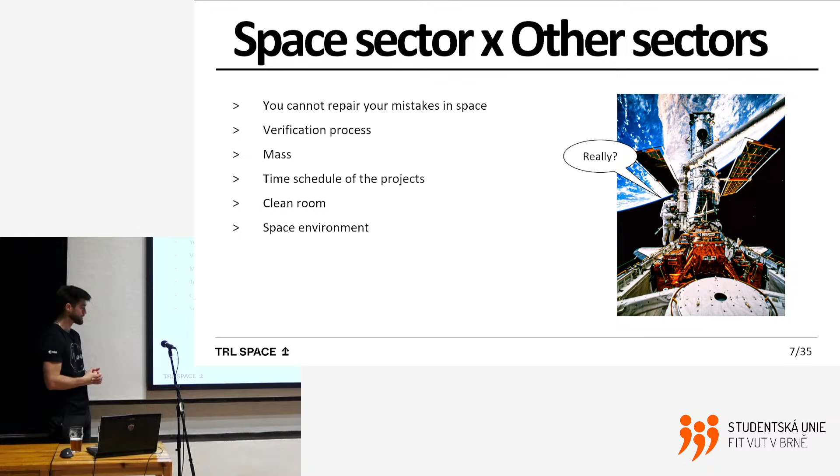And the other thing, when we spoke about environment — the space environment is also a little bit different than down here, because there is really low temperature and also high temperature. There is radiation, which is changing with the orbit, by the way, and there is also vacuum. So you need to be sure that your satellite can withstand all those things, and for some years, of course.

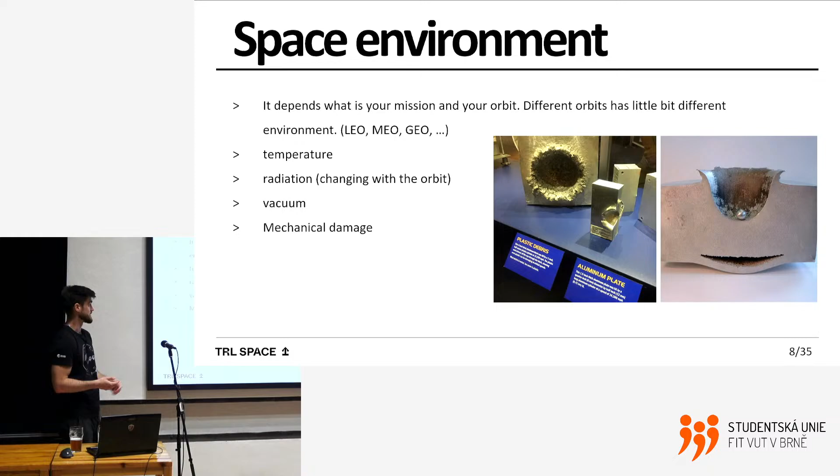So does anybody want to join this quiz? All right, so I owe you a beer—it was exactly it. So the damaged area is about 40 centimeters.

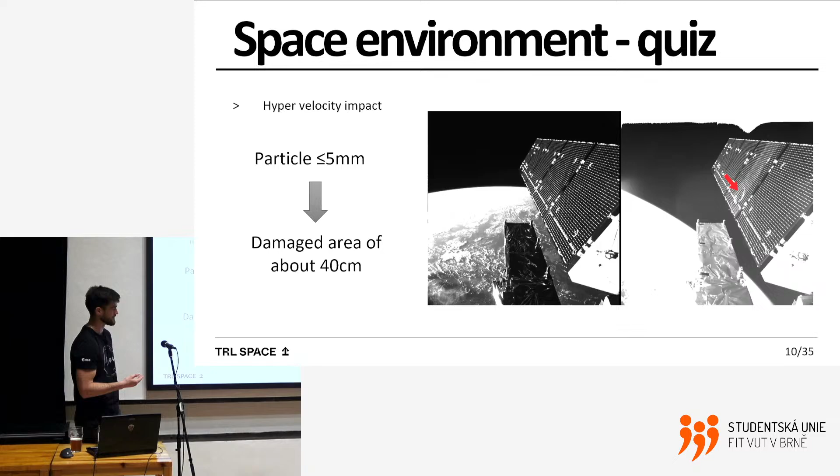So we know about the space environment, but we cannot forget about the ground environment, because we need to manufacture it there, test it there, and transport it there. When we talk about transport, you need to develop and design jigs for it. We call these GSEs, short for ground support equipment. And we do it by truck, plane, or ship.

So you transport the satellite to the launch pad and put it into the rocket. You launch it, and you can imagine there is a lot of vibration, acoustic noise, and static loads—all of which the satellite has to withstand. After you reach orbit, you need to separate the satellite from the rocket—that's another thing, mechanical shock. So it's really a nasty environment also.

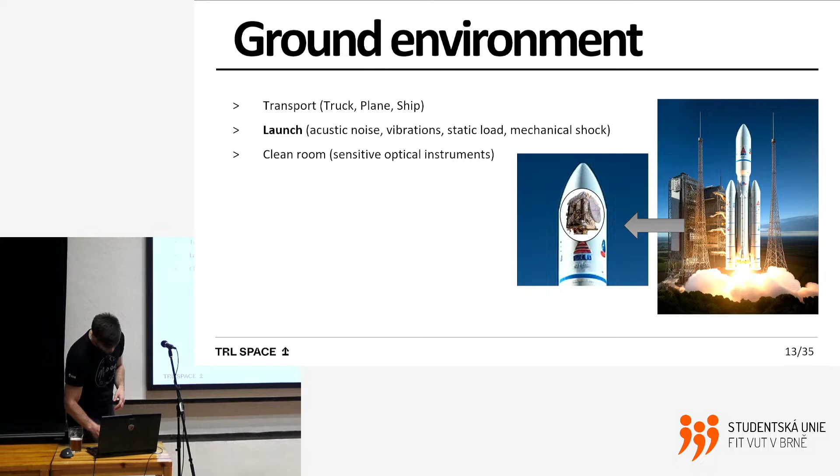And like I said before, you need to integrate, assemble, and test your device in a clean room. For those who don't know what a clean room is, you can imagine it as a surgery or operating room, because it's really similar—you have to wear gloves, wear some funny coats, and it's a really clean environment.

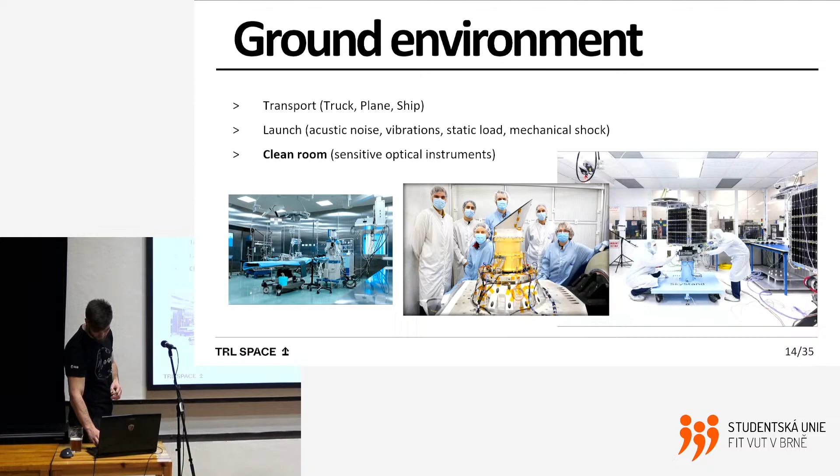So we move to something more important, and that's the structure types. Basically, when we develop the satellite, we have three options: beam or truss structure, structure from machined parts, and composite or sandwich panel structure.

I put those pictures just for better imagination—don't worry, you will see some satellites. Beam and truss structure: a beam or truss is an element or part which is really long and thin. When you put those parts together, you get a really nice structure which is lightweight and can withstand a lot of stresses and loads. You can see the example in normal life in a construction crane.

Then we have structure from machined parts, and machining is a technology process based on removing material—you have one block of aluminum, let's say, and you remove material into the desired shape. Then we have a composite or sandwich panel structure, and the best example is a door with filling.

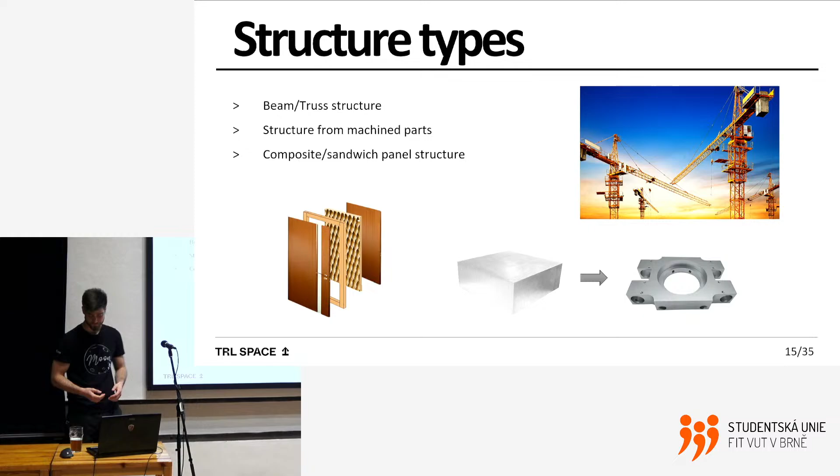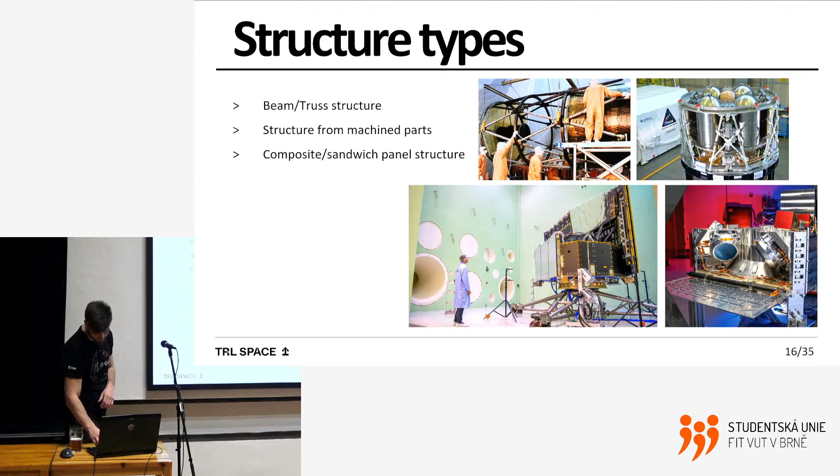So we know what the structure types are, and now I want to tell you some differences between small satellites and the big satellites, because there are some.

You can see on the left side there is a CubeSat, which is a standardized sized satellite, about this size. It's 34 centimeters high and weighs 12 kilograms. Just for your interest, this will be the look of our satellite.

And on the right side, there is some huge monster called PLATO, which is like 3.5 meters high and weighs 2.3 tons. You can already see some differences here.

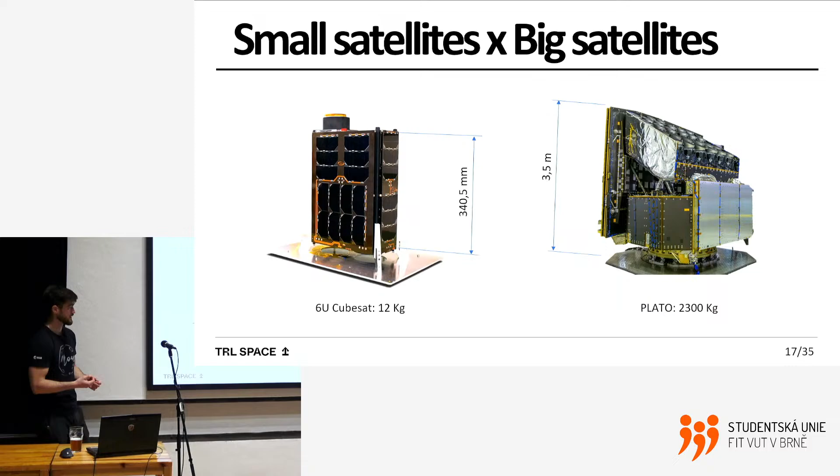But there is one big difference between the big and small satellites, and that's the logic behind the development and design. The bigger satellites are usually made with the logic that you have a payload, and you build a structure around the payload.

So you can see the James Webb Space Telescope. There are some scientific instruments and mirrors, and then there are subsystems which are placed underneath.

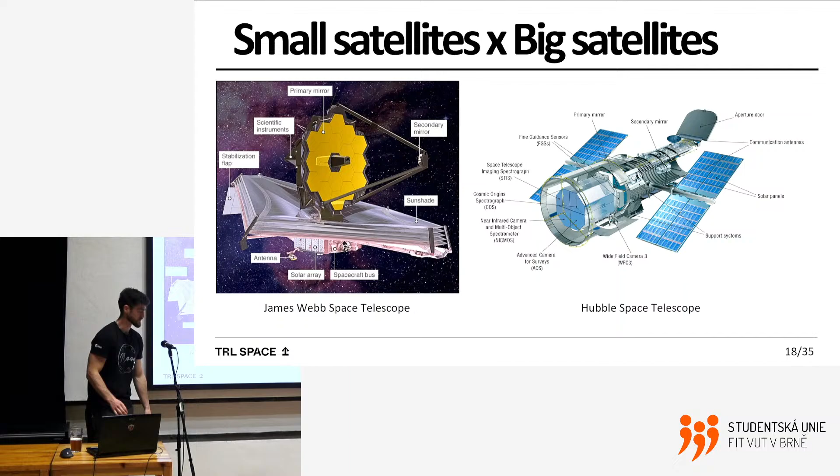Then we can see the Hubble Space Telescope. It's basically one big camera, and the subsystems are placed in the middle sector. If your eyes are good enough, you can see the node support system, and in this place almost every subsystem is placed.

So you can see also in those satellites that every big satellite looks a little bit different, right? And also one common thing for those satellites is that they are usually made from sandwich panel structure.

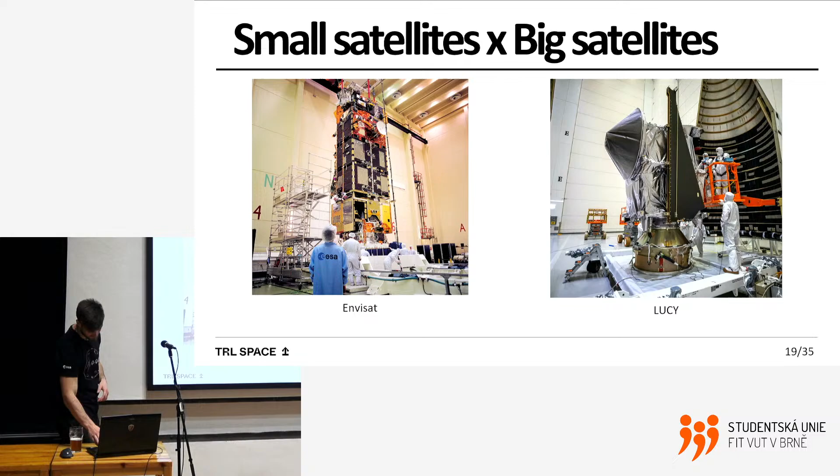On the other hand, the small satellites, as you can see, look pretty much the same. You can see the difference here. Those are CubeSats, which are, like I said, standardized sized satellites.

So the logic behind the small satellites is that you have some standardized structure, and you choose the structure due to your payload. So you have some camera, and you can see that, for example, this satellite is small for my camera, so I will choose, for example, the NAPA-2 structure, right? So this is, let's say, the difference.

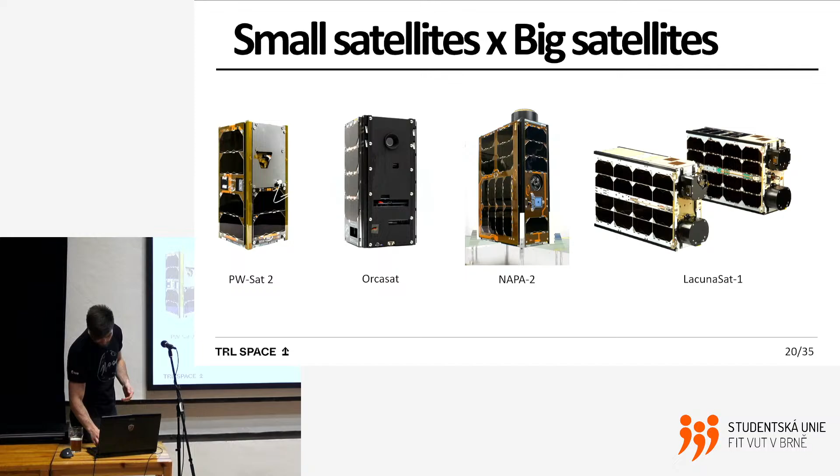And also you can see that in small satellites, they are usually made from machined parts, like you can see here. On the right picture, you can see an exploded view where the parts are machined, and then they just attach it together. That's it.

All right, so we can just move on. There is another, let's say, division of the structure types. We can divide it into the primary structure, secondary structure, and tertiary structure. One thing about the tertiary structure, it's not always the case that you have it. It's usual in the bigger satellites that you have some tertiary structure.

The definition of the primary structure is that it's the part of the structure that carries the main flight loads and defines the overall stiffness.

Then we have the secondary structure, which is structure attached to the primary structure with negligible participation in the main load transfer and overall stiffness. And then the tertiary structure, which has no participation in the main load transfer.

So in other words, when your tertiary structure fails, it basically means almost nothing, just a minor limitation. But on the other hand, when your secondary structure fails, it has some severe limitation for the mission, and you cannot do some tasks. And when your primary structure fails, it's just a game over, the mission is a failure.

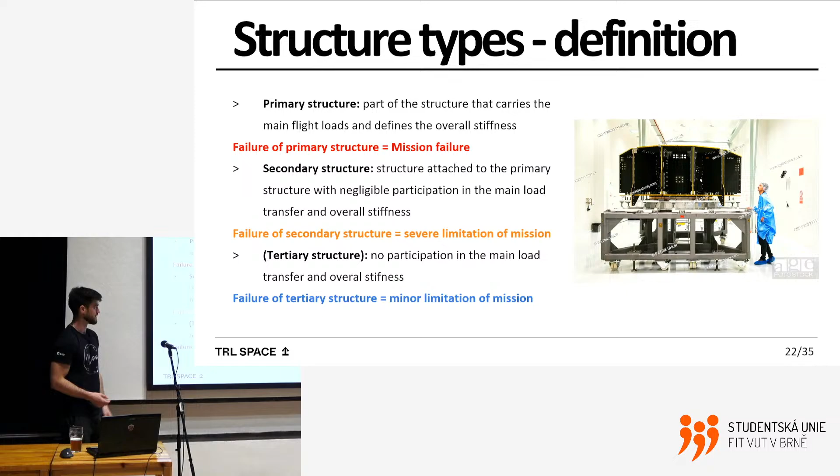There you can see some examples of the primary structure, secondary structure, and tertiary structure on those specific satellites. And when I was talking about the tertiary structure, they are shown as blue boxes, but it's, let's say, not the whole box.

It's just the case for the electronics here, because if the whole box fails, the mission is over also. But if there is just some scratch or damage of the case, it's all right. And then on the right side, you can see the primary and secondary structure on the CubeSat structure.

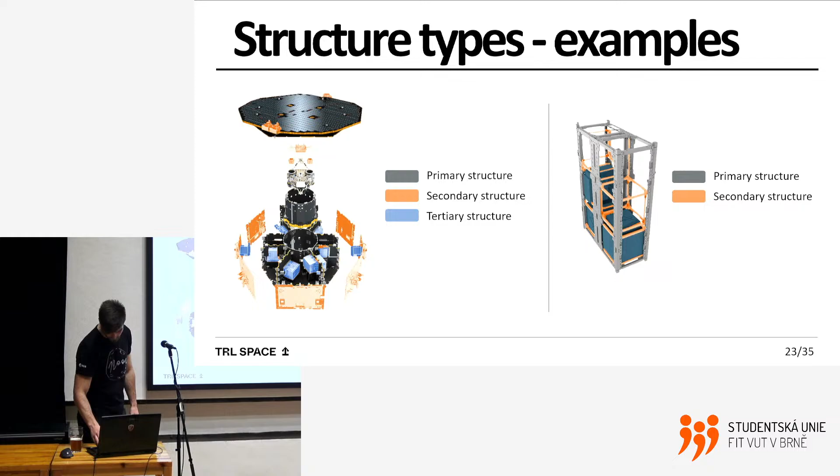So now when we know what the structure type is, we can move on to the materials. And if you remember the requirements put into the structure, mainly the strength, the stiffness, and most important the mass, it's logical that we have a really limited choice when it comes to the material. So we basically use aluminum alloys, stainless steel alloys, titanium alloys, composite materials, and sandwich panel, or sandwich materials.

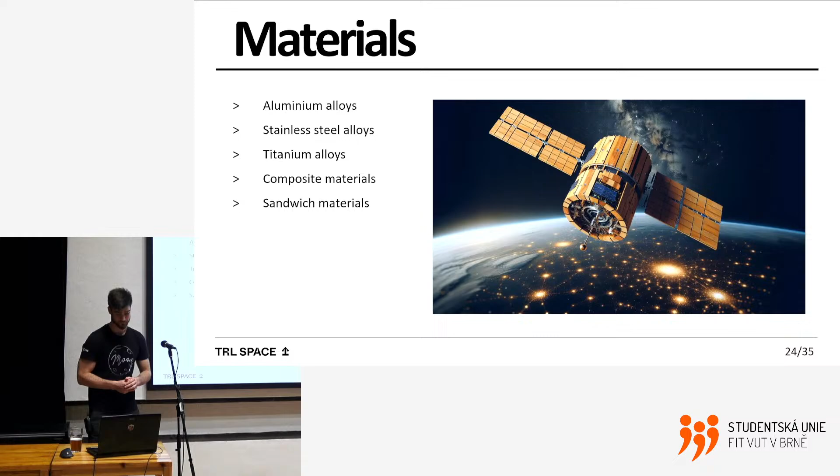The most widely used, I would say, are the aluminum alloys because of their low density and good specific properties, and good corrosion resistance.

Specific property is, you can imagine it as when you have one part made from aluminum and another part made from steel, and they are the same, they can withstand the same load. The specific property says that the part from the aluminum alloy is much lighter than the part from steel, because it's the mechanical property like strength divided by the density.

Another advantage of aluminum alloy is that it's easily machinable. They are easy to procure because a lot of companies have it in stock, and also when it comes to price, it's so cheap. But on the other hand, there is lower strength compared to stainless steel and titanium alloys, also lower hardness.

We basically, in the space sector, use 3 series of aluminum alloys. The first one is basically pure aluminum, which we use for thermal parts and thermal dissipation. Then we have the 6th and the 7th ones, which are used as structural parts because of the additive materials of magnesium and zinc.

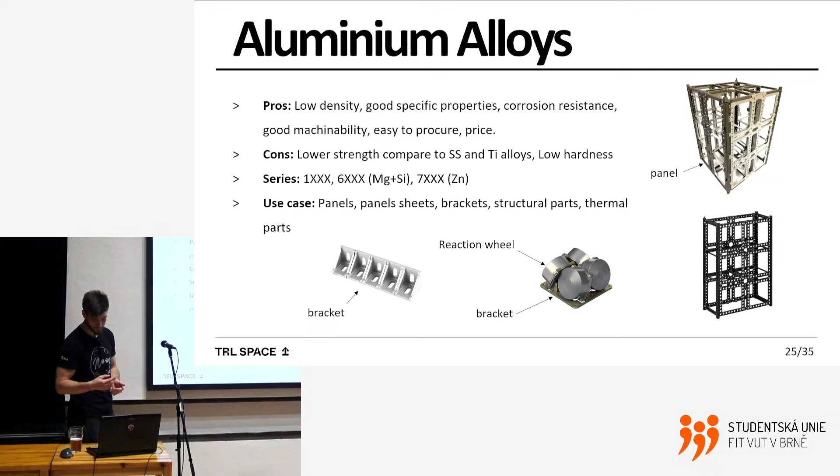Then we have stainless steel alloys. It has better strength than the aluminum alloys, higher hardness, really good corrosion resistance, and let's say okay machinability. It's not so easy to machine it, but it's much better than titanium, for example. And they are also easy to procure, and the price is affordable.

So the logical question is, why don't we use this instead of aluminum alloy? And that's what I was explaining before, the specific property. Because, for example, the density of stainless steel is 3 times bigger or higher than the aluminum alloy.

We basically use additive materials like chromium, nickel, and manganese, which add the stainless steel these properties. As a use case, we use them sometimes for brackets, but it's occasional. The main purpose is for fasteners, which we call parts like bolts, nuts, and washers.

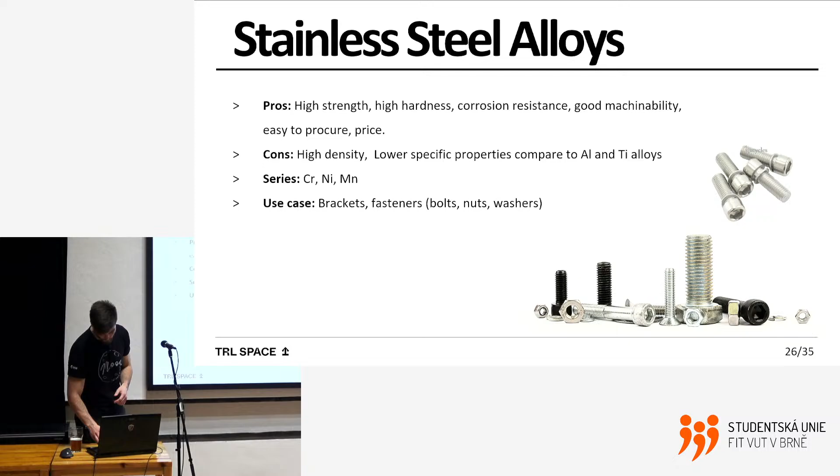Then the last metallic material is titanium alloys. An advantage, of course, is higher strength than aluminum alloy. It has better hardness, and the specific properties are the best of those metallic materials.

So you would like to choose it every time, but it's not easy to machine it, because as you can see on those left pictures, it's possible that the waste material will ignite. When there is a lot of friction, it can ignite, and that's not good. So therefore, you need machines with cooling, and you need machines which are stiff enough to be able to machine this material.

Then also there is one disadvantage, which is the price, because it's really expensive compared to the other materials. We use this pretty widely, and it's for brackets and for fasteners.

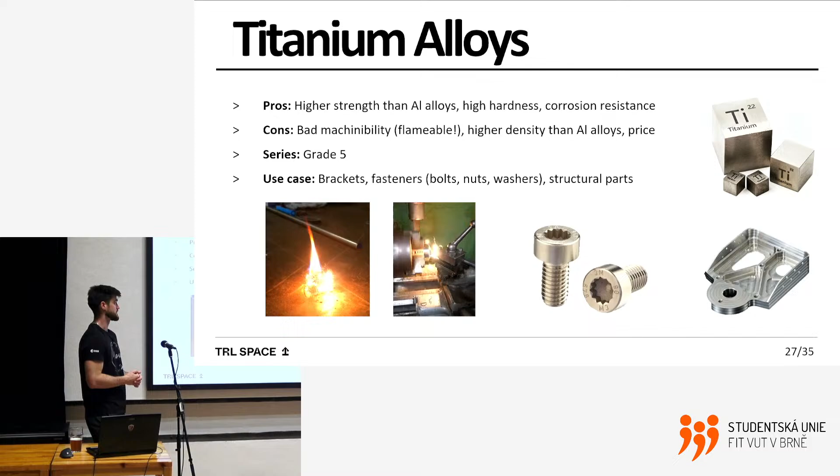Then the first non-metallic material is composite materials. A composite is a material which is composed of 2 materials which have different mechanical properties, and when you put them together, it creates a really lightweight structure or material with good specific properties. The specific properties are, for example, 10 times higher than titanium. So you really want to choose this material for your structure, because it also has good corrosion resistance.

For example, the most widely used one is carbon fiber reinforced polymers, which is carbon fiber. You can see it in a Formula 1 cockpit, for example, and it's cured by the resin. When you put those materials together, you get a really lightweight and good material.

But on the other hand, it's not easy to make, because you need really good suppliers and providers. A provider can make it bad, and there could be bubbles, and bubbles in space are really a problem. So you need to have a certified supplier. Also, when it comes to the price, it's really expensive.

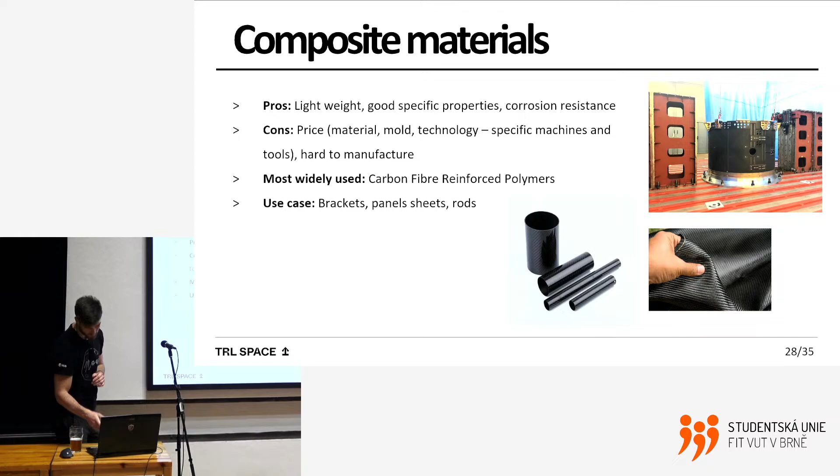Another one is sandwich materials.

Sandwich material is really interesting, and you can imagine it as a sandwich, because you have the lower bread and the upper bread, and the filling. We call the bread the skin, and the skin is made from aluminum sheets or composite material.

Then we have the filling, which we call aluminum honeycomb core. It really looks like honeycomb - it's just metallic aluminum sheets glued together and shaped into the honeycomb. You put them together, glue them, and you get something like you see in the right picture. The advantage is a really lightweight material with good specific properties. We use this for bigger satellites, because you can design a really big structure with really low weight.

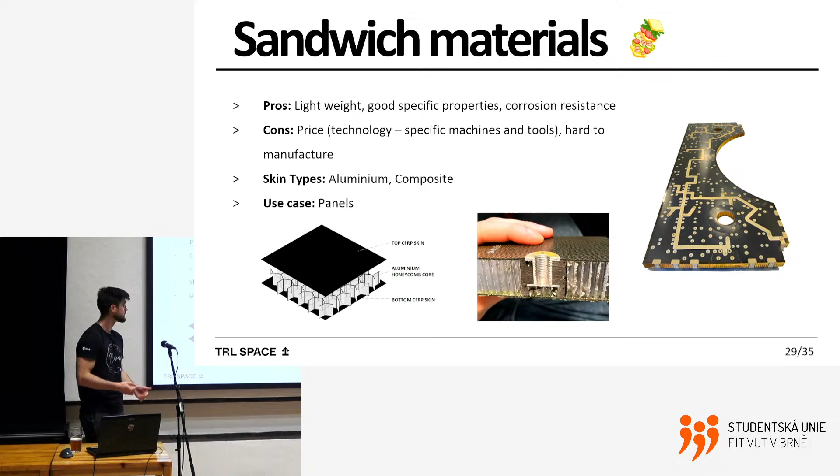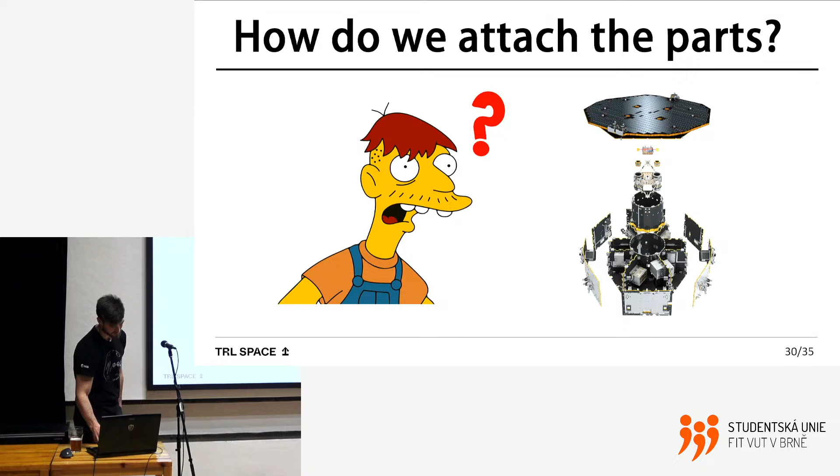So now we know what materials are used, we have some parts, and we have to attach it somehow. For this purpose we have some options - the normal option is bolts. They are easy to use, the accessibility is good, and they carry a lot of loads.

But the disadvantage is that they weigh a lot. There is a certain percentage of the satellite, maybe 10 or 20 percent, caused by fasteners. So you have to be aware of how many bolts you're using.

Also a really big disadvantage of bolts is the heavy weight, and the price and delivery time. One example from Plato: there were like 100 or 1,000 bolts, and each bolt was verified and packed separately - every bolt has a sheet with properties and verification. So it can cost a lot. To be specific, one bolt for Plato costs around 100 euros, so if there are hundreds or thousands of those bolts, it can be costly.

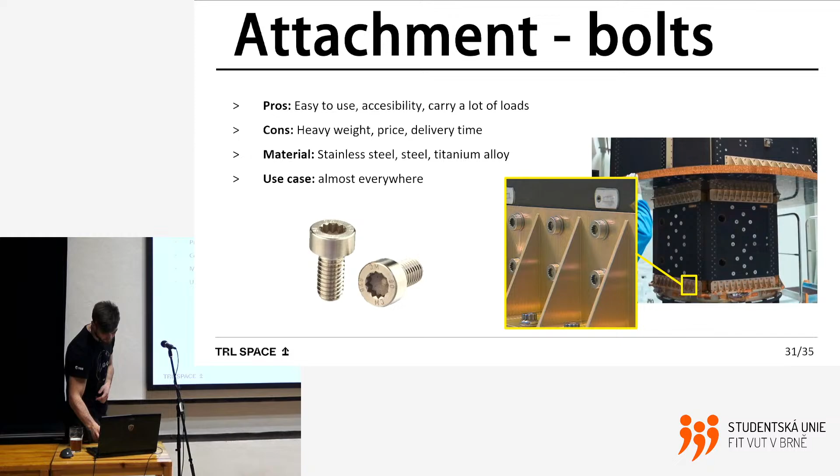Then we have another method, rivets. They are lightweight because the body is hollow, so you save a lot of mass. The price is also more affordable, and they can carry a lot of loads.

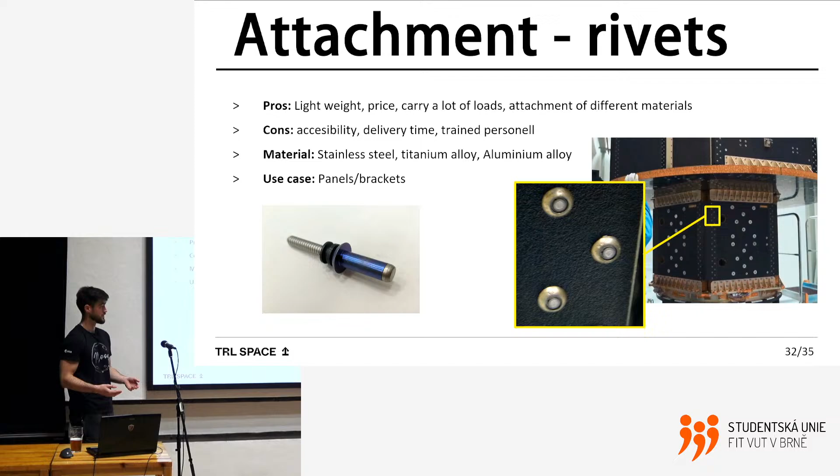But on the other hand, you need trained personnel, because it can destroy your structure. Also the accessibility is much worse than bolts, because you need special tools for riveting, and therefore need some space for it. But anyway, we use it for the attachment of panels and brackets.

The last method is attachment via adhesives. It's also a lightweight method, and we can attach different materials with it. But on the other hand, it cannot withstand a lot of loads, and it's complicated for manufacturing - there could be bubbles, and they are a problem.

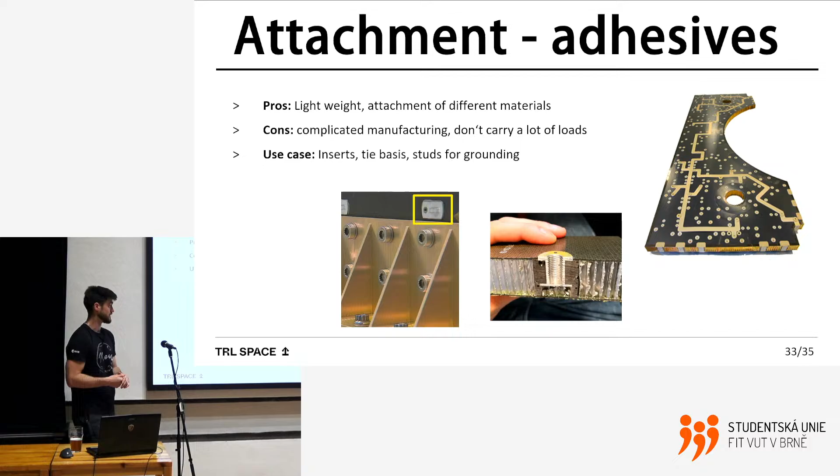You can see it here, and we can attach a harness with it. This is, for example, a dispenser, and it's kind of a Frankenstein, because every one of those attachment methods is used, as you can see.

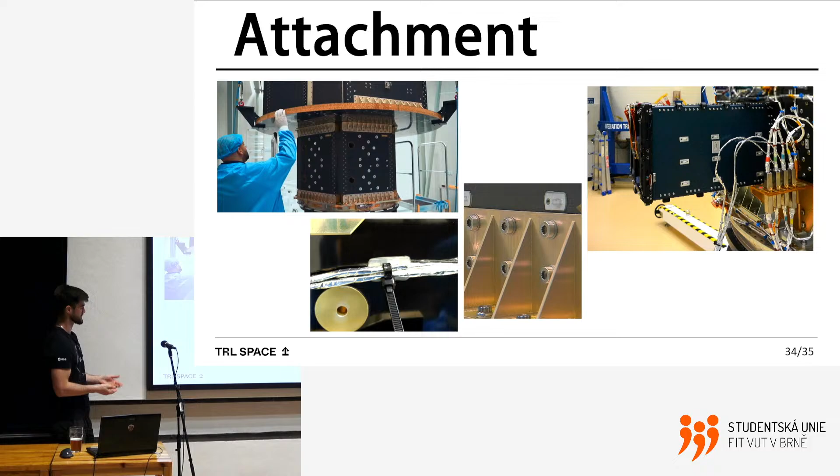So we got to the last slide. If you remember, when Adam and Christina talked about the design phases in the space sector, they start with phase 0, which is basically a feasibility study, and it ends with phase F, which is called disposal. Development of the structure for the satellite is mainly in phase B and C.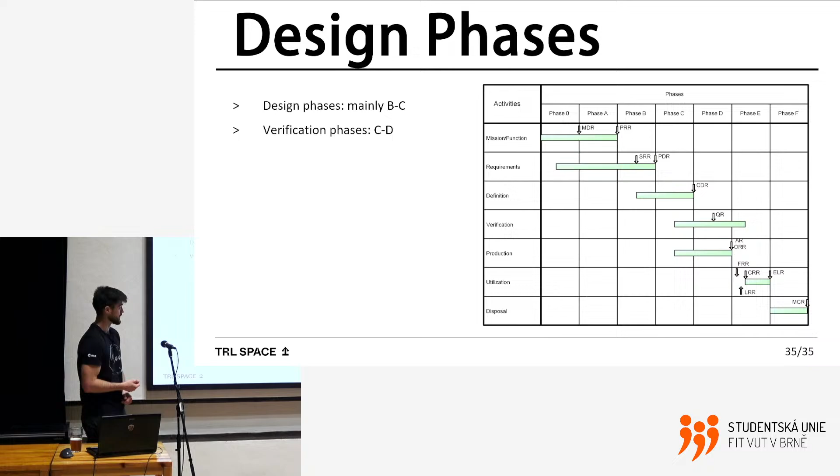Then after the design phase comes the verification phase. It's ongoing in phase C and D, and Jakub will tell you more about it in the next presentation. So I thank you, and if you have any questions, and I know the answer, I will answer it for you. Thank you.

Any questions? I hope not. I just wanted to ask, you mentioned that the rivets can damage your equipment, the structure. Yeah, why is that?

Because, for example, we attach the composite material, which is carbon fiber and resin, and you put the rivet into the hole, and you have to squeeze it, because the rivet works like this - there has to be some mechanical damage of the rivet to put the part together. So it gives load into the structure, and if there is a sharp edge of the rivet, you can destroy the structure.

You said before that air bubbles are real trouble in composites. In rivets, when you squeeze them, don't you create bubbles sometimes as well? Is that a problem? I'm not sure if you can make bubbles by that - you basically squeeze both parts together. I don't think so, that you will make bubbles by that. But the bubbles are a problem, yeah.

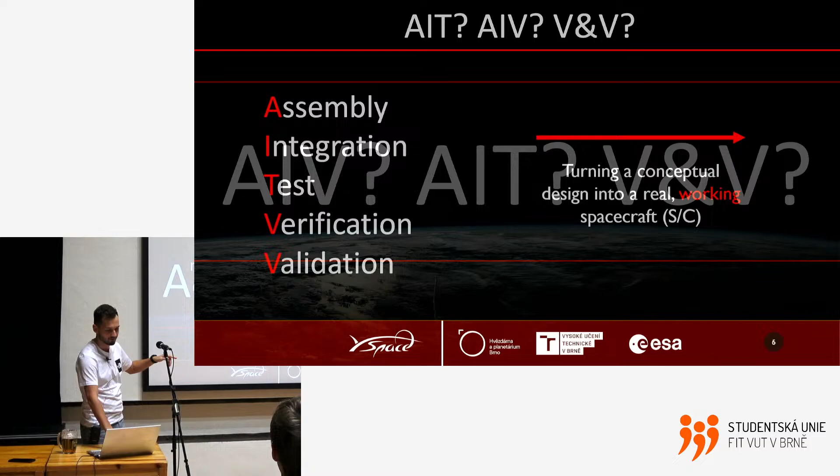So what do those letters mean? They mean assembly, integration, test, verification, and validation. In other words, it's a process of turning a design into a real product. So you have something designed in your mind, computer, or on paper, but you also need to really manufacture it and assemble it. So you want to create a real spacecraft, and most importantly, a working one. You always want a working spacecraft, not just something that doesn't work.

So what does assembly mean? It means that you are physically combining all those parts together and creating some bigger structure or larger entity. And what does integration mean? Integration means that you are not only combining those parts together physically, but also combining them so they can work together, communicate, and be functional.

And those two words, or those two processes, if you take them, you should have like had a physical spacecraft. If not, somewhere is a problem.

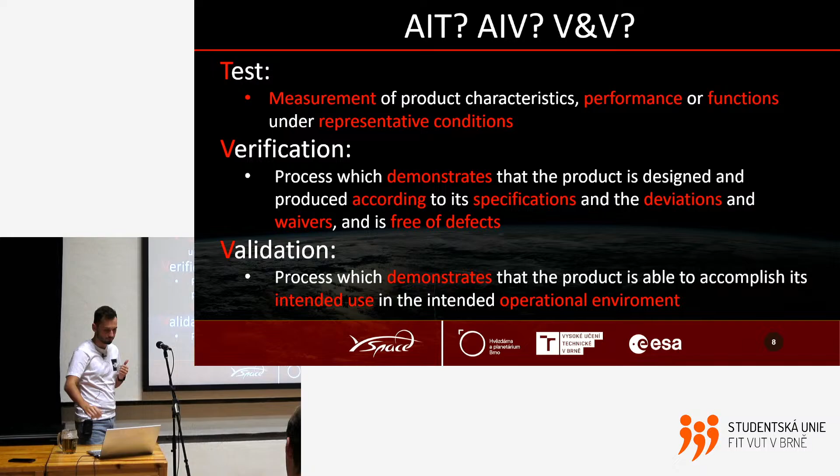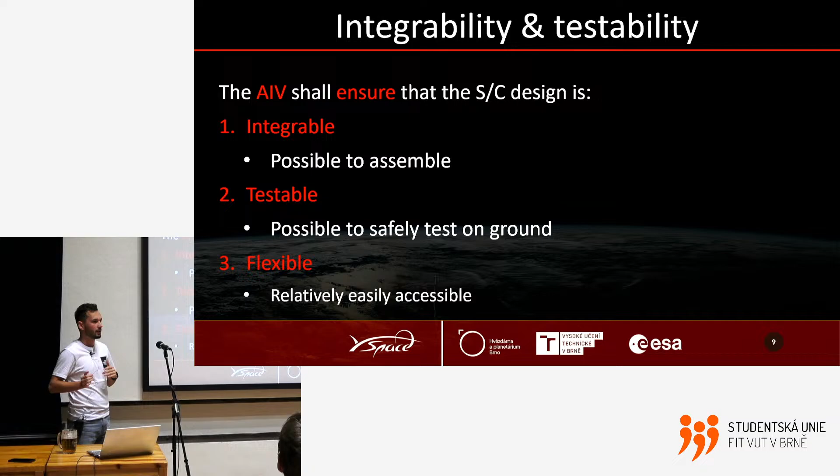And what's AIV responsible for, is that the whole satellite is integrable, testable, and flexible. If it's not integrable, it's not possible to assemble the satellite. If you have planned to put some big part into a small hole, it won't work. So we always want the satellite to be integrable. Testable means that you are able to test all the specifications, all the requirements. If you are not able to test some requirements, there is something wrong with the requirements or with your design. And finally, flexible means that if something goes wrong, something breaks, it's easily accessible and you can change it.

Let's look at the verification approach, and there are three main questions: what, how, and when. What are you going to verify? Does anybody know? Yeah, requirements. How are you going to verify them? What can you use? You can use different methods. And when are you going to verify them? Are you going to verify them at the beginning of development, or at the end, or in the center? It's different, and it differs according to models, levels, and stages.

So let's not look at what are you going to verify, because I think my colleagues have spoken a lot about requirements, but let's look at how are you going to verify them.

Firstly, inspection. That means that when you get some part into the warehouse, into your assembly facility, you are going to look at it and look for some defects, some misalignments, and something like that. We are going to measure it, but not completely, just some simple measurements. So firstly, look at your part or subsystem, system, spacecraft. Then you are going to make a review of design. That's the second thing you can do. So you can look at the documentation and compare if it's made how it should be or not. So yeah, you have to write the reviews.

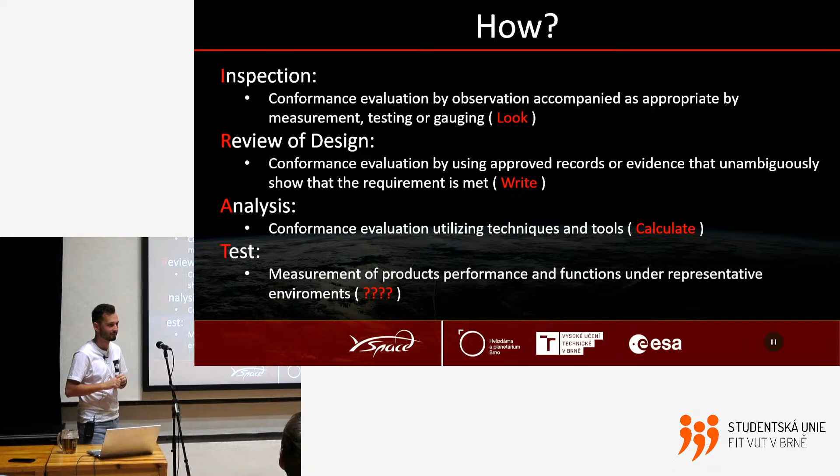So next question, when? When are you going to verify things? As I said, it depends, and the verification process is a little bit longer. It's not like one day. Verification takes place over a huge amount of time, at different moments in the product's life, and some of the verifying stages are qualification, acceptance, pre-launch verification, in-orbit verification, and post-life or post-landing verification. So qualification, acceptance, and pre-launch are before launch; in-orbit and post-landing are after.

Why are you going to verify something after landing or after you send your satellite into orbit? It doesn't make sense. But it makes sense because some requirements you cannot verify on the ground. You are not able to verify them here. You have to verify them in orbit or after landing, after post-life. And those requirements are maybe like, the example could be, you maybe saw the Orion capsule from Artemis 1. Yeah, there were heat shields. How can you verify that heat shield will work? You cannot really verify it on the ground. So they sent Orion, it completed the whole mission, and then went back home and landed.

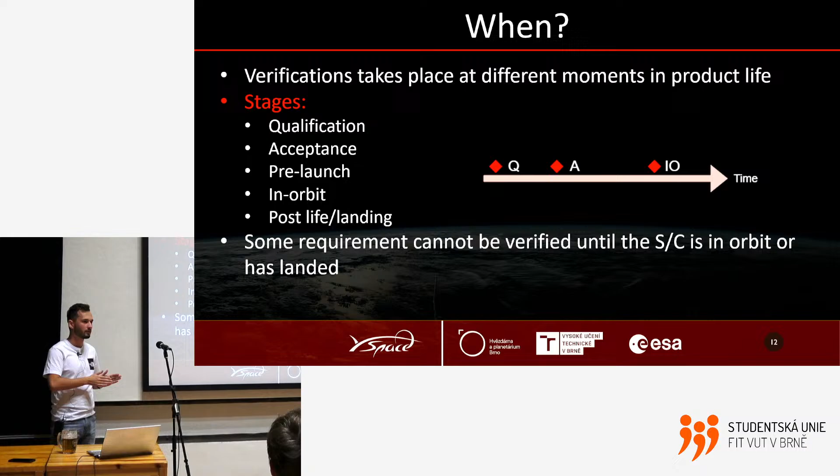As it should land, yeah, it doesn't blow up, so it's good. But they are still today verifying the heat shield. They are looking at it, making measurements, and so on. So some of the requirements you cannot verify on the ground before launch, and don't be scared if you find some requirements like that. Just be careful about that, but don't be horrified or something like that.

Then what's qualification? Qualification is a process in which you are verifying or demonstrating that your design meets the applicable requirements, with some qualification margins. It's the first of the series of verification processes.

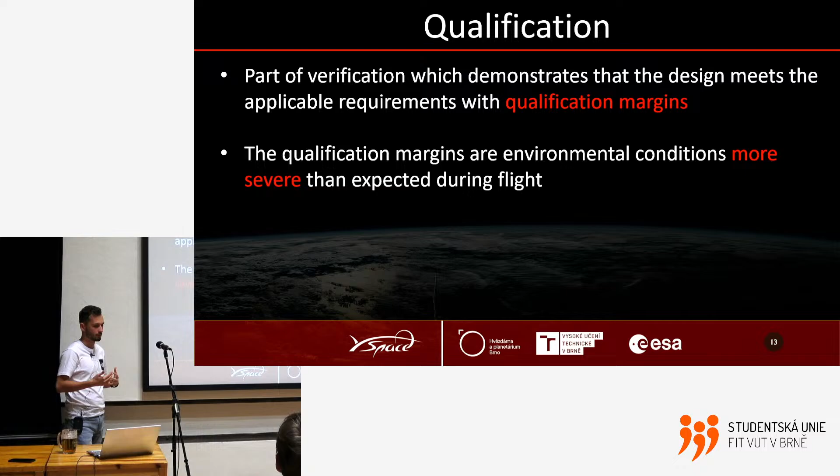What are the qualification margins? I think Adam was talking about it in the first presentation, but I will summarize it quickly. You want your subsystem to work at specific temperatures, say fluctuating from maybe 20 to minus 20 degrees Celsius. But for qualification margins, you want to be on the safer side, so you make them more severe. You will test your subsystem to fluctuate from, say, minus 25 to 25, only to be safer. That's qualification.

After qualification, you go to acceptance. You want to accept your design as good, without any errors, that it really works as it should. It's a process in which you are assuring that your subsystem or part of the spacecraft is working as it should, is built in accordance with the qualified design that was previously qualified, is free of workmanship defects, and meets the specified acceptance margins.

Are those acceptance margins more or less severe than qualification margins? That's a second tricky question, not a beer question. More or less? No one? The answer is: acceptance margins are not more severe. The most severe margins are qualification margins. Acceptance margins are more severe than the actual environment, but less severe than qualification margins, because you already qualified the design to withstand more severe margins. Now you are accepting something, and you go lighter on it.

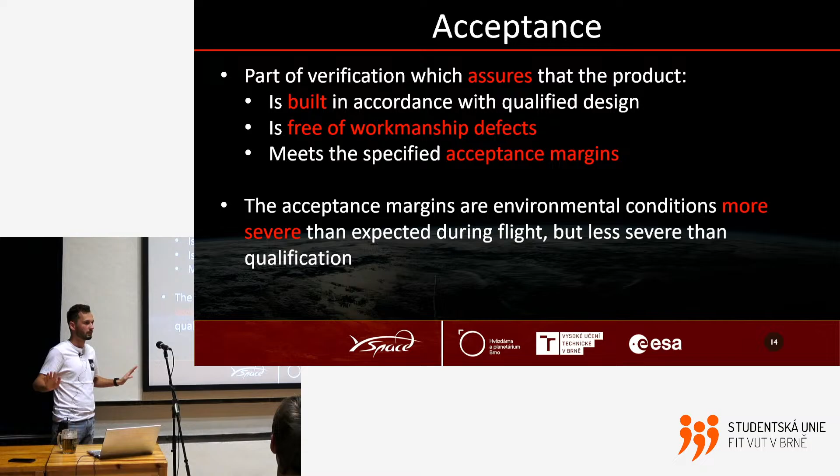Let's make an example of how it works. We have a CubeSat with different subsystems, and I will now focus on AOCS, which consists of reaction wheels and a magnetorquer. So you want to go through the process: firstly, you do qualification of the reaction wheels and magnetorquer.

After you qualify those two, you can qualify the whole AOCS, but still not the whole CubeSat—be careful about that. After you qualify the whole AOCS, you know it worked, so let's make acceptance: you make acceptance of the reaction wheels, the magnetorquer, and then acceptance of the whole AOCS. If you have acceptance of all subsystems, then you can try to put them together into the CubeSat, firstly qualify the whole CubeSat, and then make acceptance.

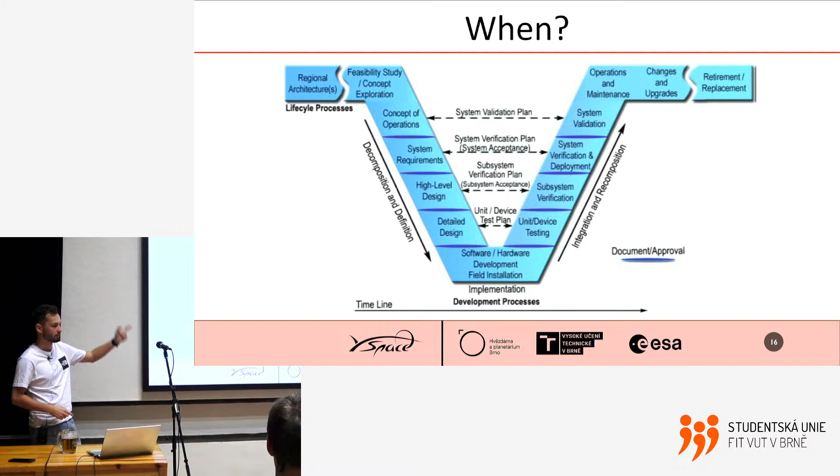So do we build directly the spacecraft that will fly? You can, but I wouldn't do it.

Let's look at the model philosophy. There are many models: structural model, thermal model, engineering model, qualification model, flight model, proto-flight model, avionics test bench, and many others. But why? Because you want to reduce the risk—always reduce the risk. As Ondřej previously said, you cannot really repair something in space. Well, there was one time, but it's really, really expensive.

And which model should you use? There are many models, but each product has its own model philosophy. Sometimes you need an engineering model, sometimes not. Sometimes you need a thermal model, sometimes not.

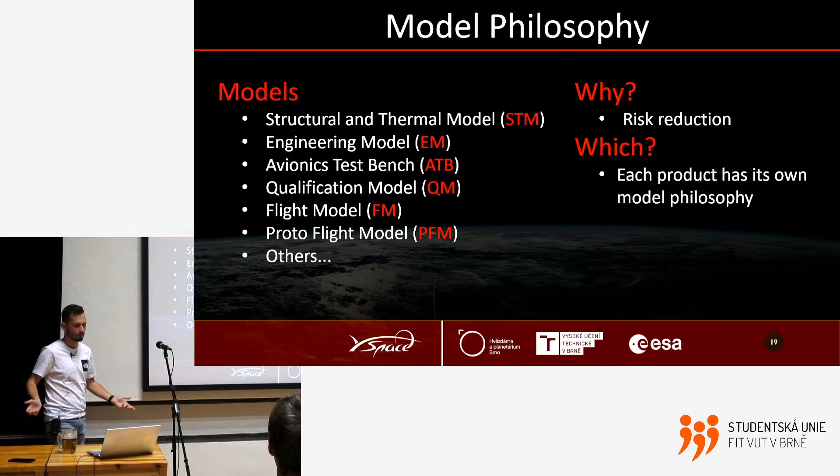Let's look a little closer at those models. The structural and thermal model is representative of the design—physical and structural, and thermal. It's representative of those properties but not really detailed; it's made from dummies of lower-level subsystems. These dummies are pretty close to the real thing, with similar properties, but they are not the same.

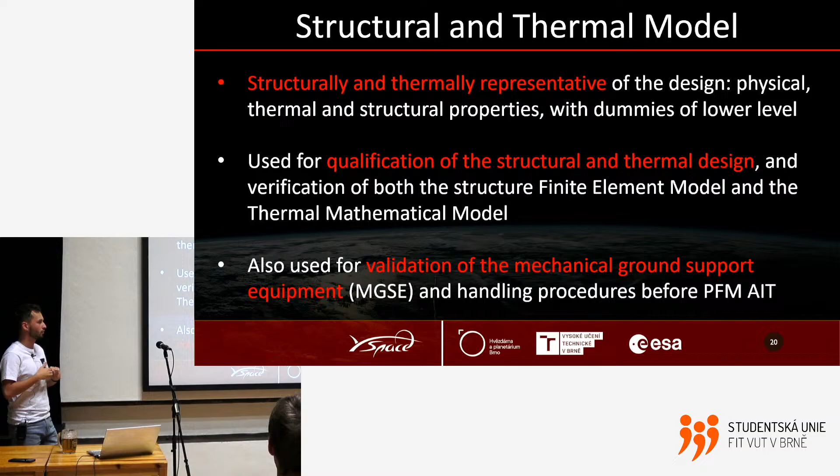So why should you use the structural and thermal model, or for what? This model is used for qualification and for verifying the finite element model and the thermal mathematical model—all those simulations you made previously, or are still making. It's also used for validation of the MGSE, the mechanical ground support equipment.

Then the engineering model is also some kind of representative in form, fit and function, and it's already functional, but you are not using real components that you will use in space. You are using less reliable parts and usually without redundancy.

This model is used for functional qualification and verification of electrical and software interfaces, and also for EGSE, electrical ground support equipment.

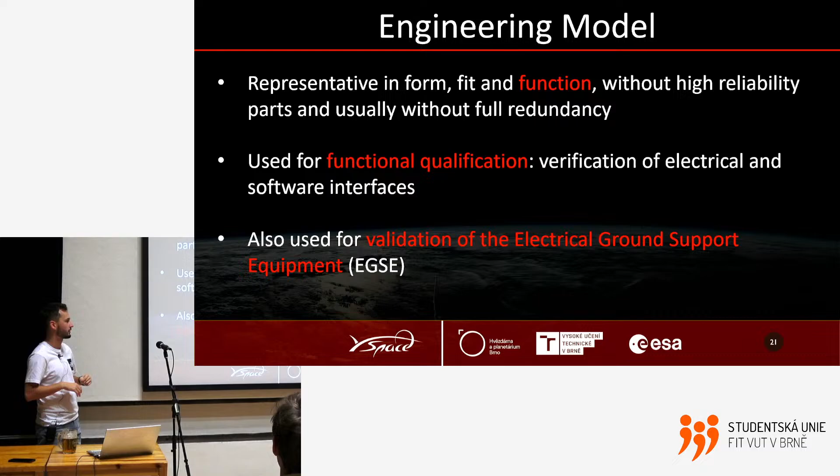Then there is the avionics test bench. It's composed of an engineering model or qualification model. Still, you want to see a functional model that's really functional, but it's not built in the form of a spacecraft, it's like subsystems only connected via wires and some other attachments.

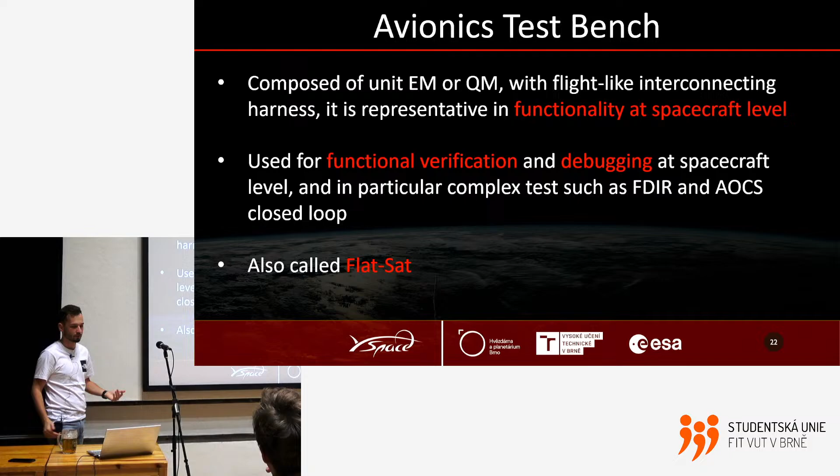And there is a second word for this test bench, the avionics test bench. Does anybody know what's the name? You heard it already, maybe in another presentation. It's flat sat, if you remember.

And the flat sat is used for functional verification and debugging of software errors or other errors. Finally, or not finally, there's also the qualification and flight model. Both of them are fully representative, so full redundancy. There are real parts, not space-graded parts, but real parts, so they are fully representative. But what's the difference between them? The qualification model is used for qualification, and the flight model is used for acceptance. In this model philosophy, you are not using one model for both.

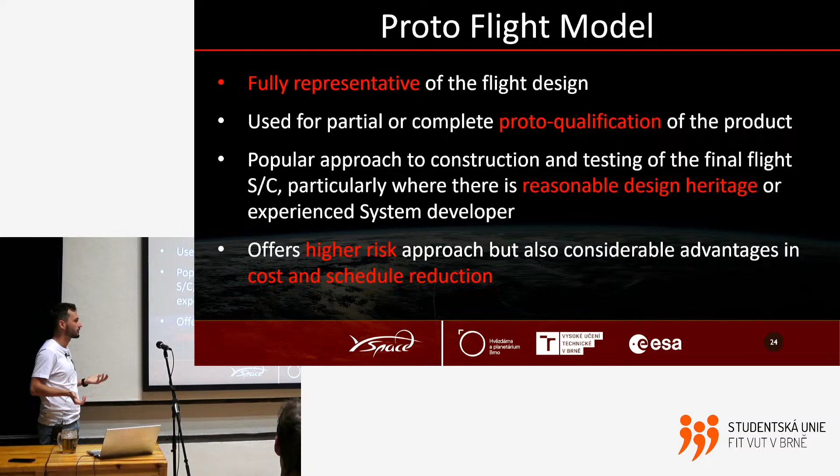But there is one philosophy, the proto-flight model. This is a fully representative model, used for proto-qualification. It means it's not as severe, a little lighter on the spacecraft, but you're using the same model for qualification and acceptance. There is a much higher risk, but you don't use the proto-flight model when making some really big satellite that nobody has ever done before. You use this model philosophy when there is reasonable design heritage or an experienced system developer, maybe using off-the-shelf components. The advantage of this model philosophy is cost and schedule reduction.

Okay, so let's look at tests. If we vote, I'm continuing. We are not voting because... yeah, so why tests?

Because there are many questions. Will we survive the launch? Will we survive in outer space? Will we function and perform correctly? And will we fulfill requirements? You always want to answer these questions, and that's why you are going to test your system, subsystem, spacecraft.

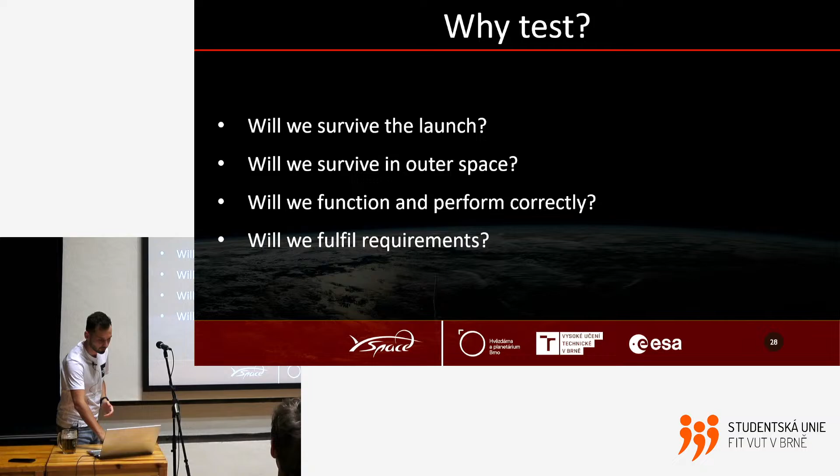So what is waiting for us when you want to launch your satellite into orbit? There is acoustic noise, vibrations, static loads, mechanical shocks, radiation, vacuum, debris. Basically, everything wants to kill you, and you want to survive. So that's what death is waiting for you, basically. Feels like Australia, yeah.

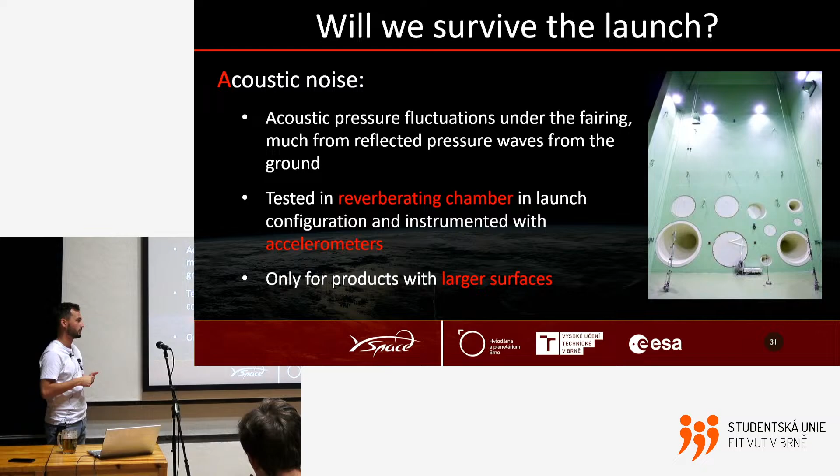So, will we survive the launch? Let's look at all those things. Acoustic noise, it's not like you have speakers next to your spacecraft, the noise is in the form of pressure waves, pressure fluctuations. It's a really specific thing for big satellites because acoustic noise is pretty special, and you are going to test them only on bigger or larger surfaces. For this you have a reverberating chamber, you can see it in the picture, and you also use accelerometers as an instrument of testing.

Then there is vibration, in the form of sinusoidal or random, you have both of them. You test it via shaker and also with accelerometers. And with vibration there is one specific thing: you firstly test low level sine, then go through high level and through the random, and then again through low level, because you want to check if some degradation is there or not.

Then there's static load. It's basically made from the rocket itself, because you are accelerating, and it makes a lot of load on your spacecraft. For this you are using test rig, or something like that. I probably can't pronounce it right.

For CubeSats, or for CubeSat structures, if you are using some off-the-shelf structure, you don't really need to test that, because someone already tested it before.

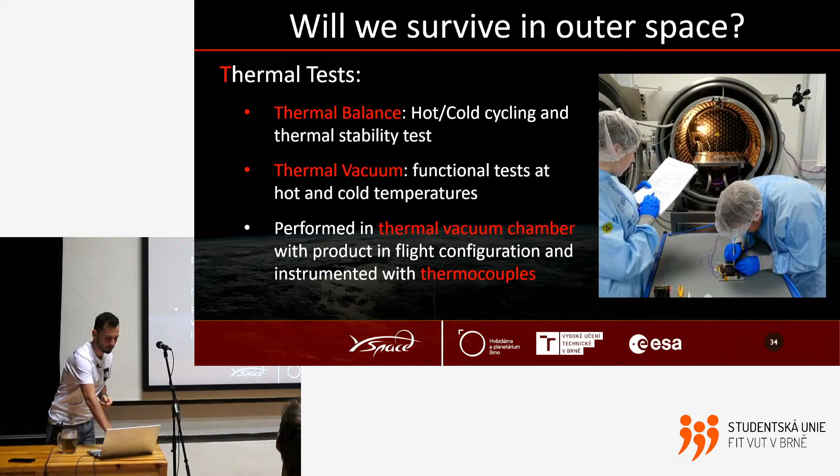So how does the environmental test campaign look like? What are you going to do first, what are you going to do last? So firstly, you come to the testing facility.

You unpack everything, maybe assemble your satellite or something. Then you make a pre-test functional test to check if everything works, because you can't bring a non-working satellite and then test it. It doesn't make sense. You make a pre-flight, pre-test test, let's say.

Then you attach accelerometers, go to sine vibrations, make a functional test, go to random vibration, again a functional test, then take out the accelerometers, install the thermocouples, and go to TBTV, thermal balance and thermal vacuum test. Then you go again for a functional test. If everything works, you uninstall the thermocouples and go for the EMC test.

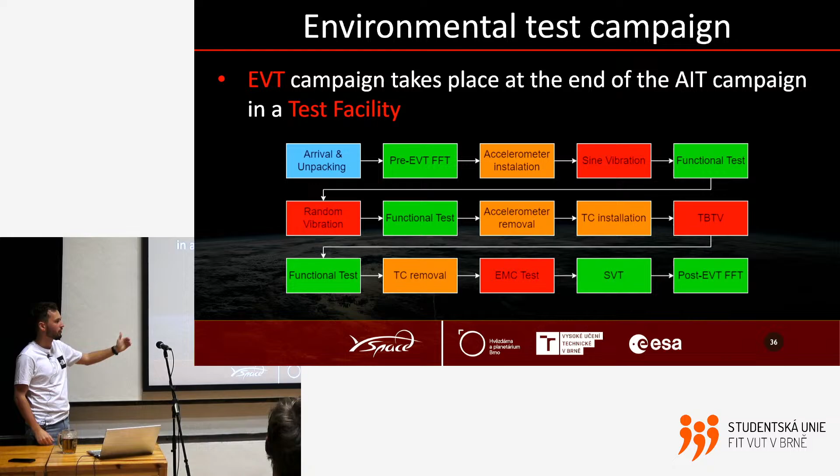And there is one golden rule. Why does it go like that, why do you go from vibrations to maybe some shock test, and then to vacuum and EMC? The golden rule is: shake it before you bake it, because you want the spacecraft to go through the tests in the same order it will go through all those hazards.

So that's it for the tests. I already said something about ground support equipment, and it's part of the work of space engineers. You are not only designing all those spacecraft subsystems and stuff like that, you always need some ground support equipment.

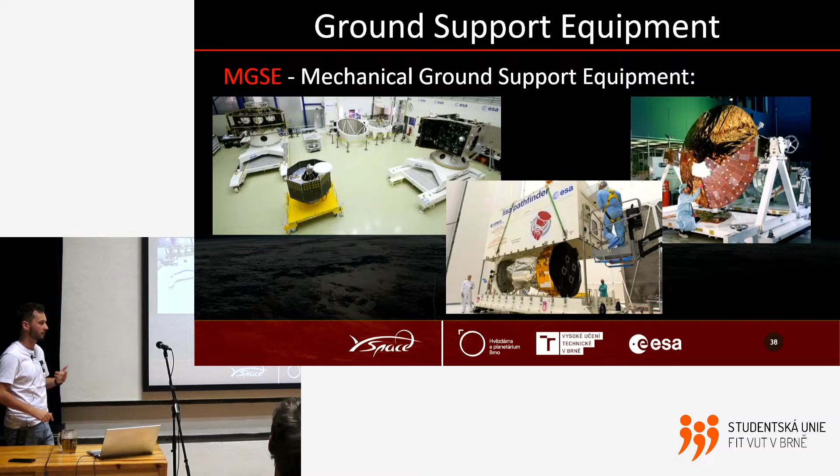So there is mechanical ground support equipment, so maybe some stands, boxes for transportation, and stuff like that. Then there is electrical ground support equipment, for electrical tests and stuff like that. You sometimes want to simulate one of your payloads because you don't have the payload developed yet, so some of that equipment really simulates the power consumption and generates some data.

I also saw or heard about one piece of equipment that was like maybe a 3 by 5 meter 3D model of the moon's surface, just to verify the navigation system. So a camera was going above this modeled surface, and was trying, not to guess, but to tell you where you are. So sometimes you make some cool stuff like that, but not always.

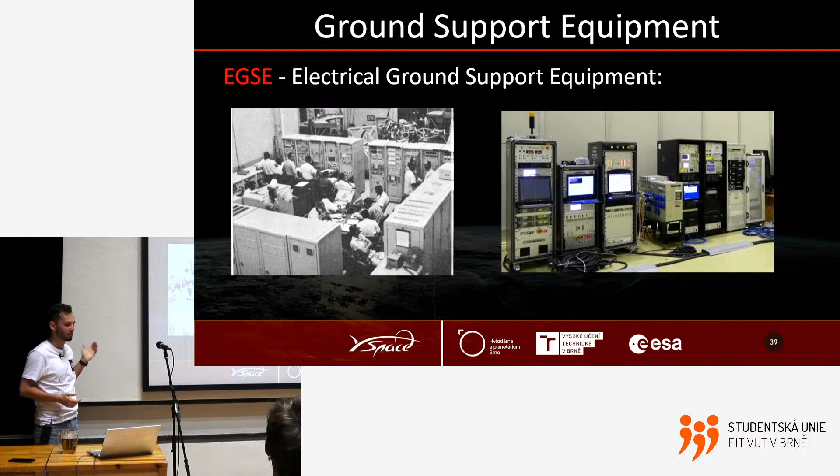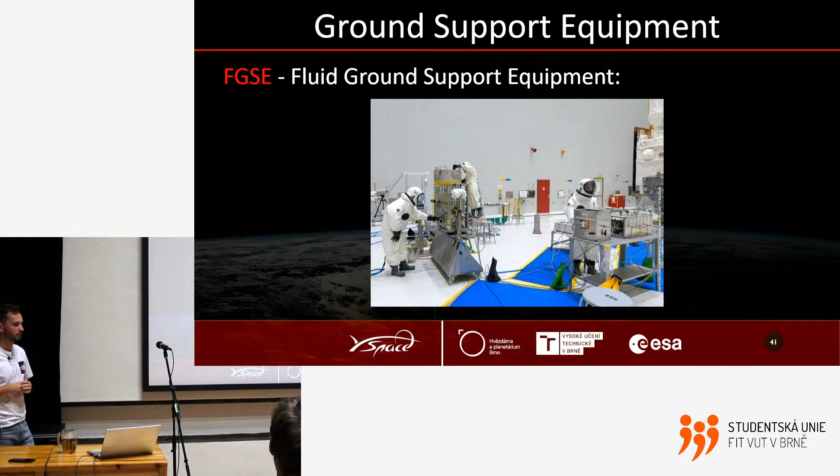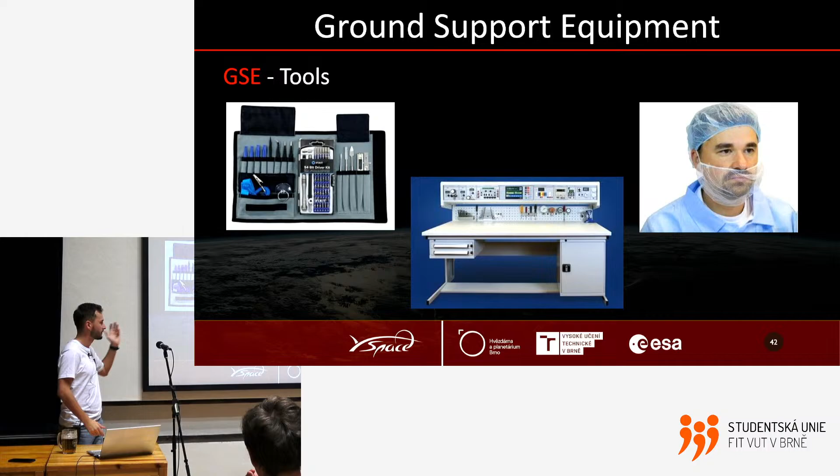Optical systems need some support equipment, like cubes for calibrations and stuff like that. Also, very dangerous thing, fluid - like the thrusters and rocket engines are very dangerous, so you need some support equipment for that if you are going to fill it up. And you cannot forget about some basic stuff like clothes, hats, screwdrivers, and everything you can see here.

So I have a second beer question. Is there something we should do before testing? I haven't mentioned it yet. Can you be more specific? I don't want to be.

Yeah, there are a lot of things, but imagine you are in the test facility, you have everything prepared, you have the whole spacecraft, you have all the equipment. Test procedure? Yeah, test procedures.

So you need documentation. I think everybody here was on some labs or something like that, and you got some procedure, and then you had to write some report or something like that. So that's also here, and that's a very important thing. So there are a lot of documents - you have some plans, specifications, procedures, reports, schedules, and then some final conclusional document.

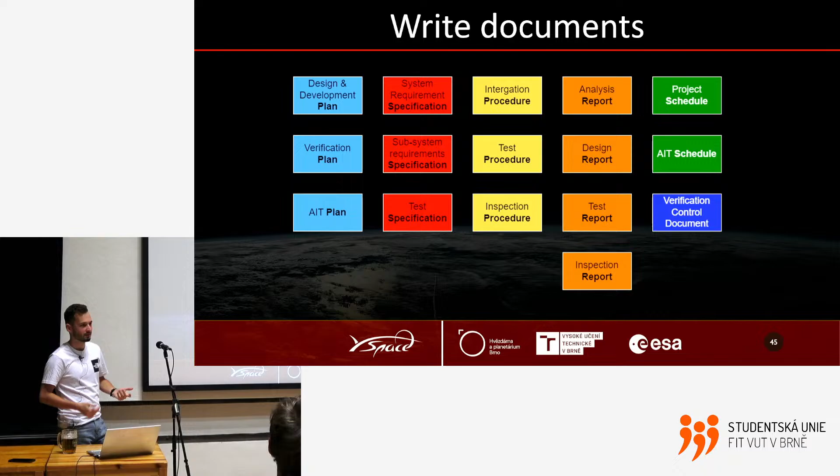And why do you need such procedures and reports, like maybe integration procedures? Why do you need them? That's a good question. And you need it because there is one video, and I hope the Wi-Fi works.

It doesn't work, sorry for that. But maybe you heard about it - it was a Russian rocket. It started and then just turned around and went straight to the ground. It was up and down. And there was one thing, and it was not like a mistake in procedure or something.

There was a procedure for that, but someone who was installing the accelerometer installed it upside down. And what's more important, it was a vertical accelerometer. So the rocket started, but thought that it's going in the opposite direction. And it's like, why? I want to go up, not down. So it tried to change the course, so it steered and went to the ground.

Yeah, the Russian rocket, so it's normal. I wouldn't say that, because Russians also have Soyuz, most reliable rocket ever known, probably. Yeah, it's really old, but what? Yeah, yeah, okay, yeah, it is most, but most used before 2020, maybe like that.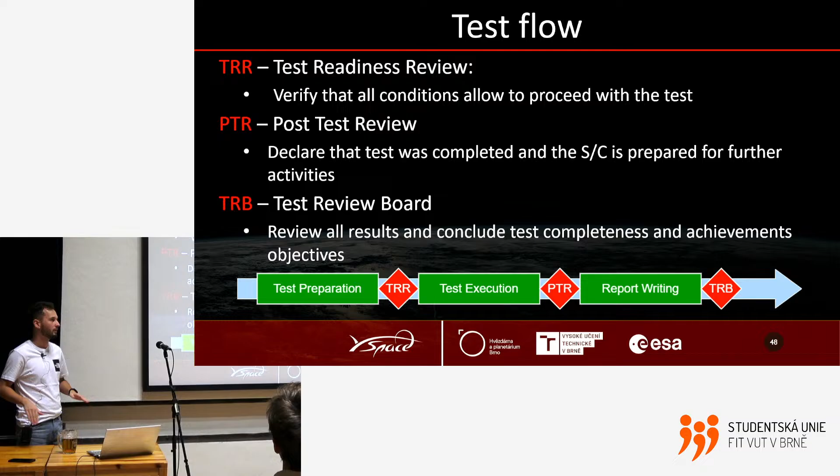If yes, you go through the test campaign or test execution. Then you have a post-test review, so you look at whether you made everything you had to make or something like that. And then you go to write all those reports, and at the end there is the test review board, which is pretty crucial. It's a meeting where all the guys will meet and agree or disagree on the results of the test, and will close the test campaign or make some additional tests.

So yeah, and what if something goes wrong? What if you measure something and it doesn't comply with requirements?

So what to do? There is always a product and quality assurance guy, or there should be. ESA is pretty strict about it, so you need PA or QA. They should be independent, and those guys you always hate because they're always complaining that you made some mistake here, some mistake in documentation and something like that. But that's their work, and they always check everything.

And if something goes wrong on the test, or something is not like it should be, there is a non-conformance report. You open this report and fill it in. The main goal of this report is to find the root cause of the problem, identify it, and decide if it's okay, if it didn't go how we wanted to, but it's not a real problem. So you can go with launch, but sometimes not, and sometimes you need to make changes.